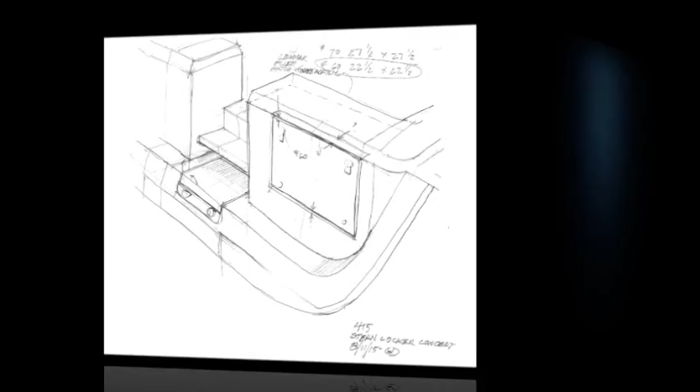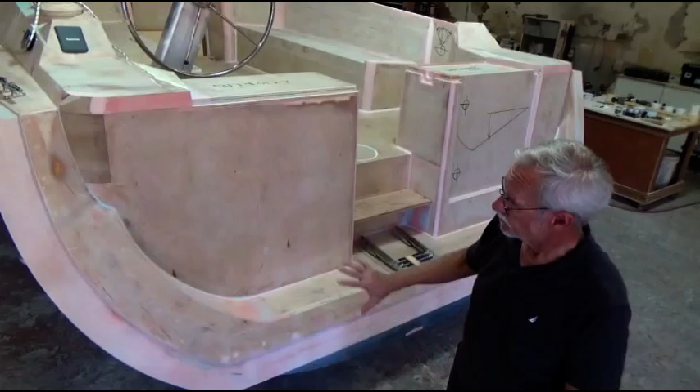We're looking at the stern of the 425 hull and deck plug. This boat will have a kind of unique hull to deck joint, a joint we first tried on the Catalina 275 Sport. We feel it's a great looking and extremely strong joint. What you see here will not be part of the boat.

The hull actually ends right about here, and this flange that you see recesses into the hull, so it's a continuous surface. Again, very strong because we've molded this corner into the hull, and the deck flange starts here. So the hull has the molded-in fiberglass toe rail.

So there's an internal flange hull and deck joint with the toe rail an integral part of the hull. Very clean looking, extremely strong. We bond the two joints with methyl methacrylate adhesive, and it's through-bolted where hardware bolts through.

What you see here is the stern platform. The hull actually ends right down here. This flange will not be part of the boat. We have a stern platform. In the stern platform, we've recessed the boarding ladder, so this will be a hatch. This boarding ladder will be underneath that hatch. It won't be mounted on this surface as you see it.

So you lift up this hatch and pull out the boarding ladder, as you do on some of the other 5 Series models. On the starboard side, there'll be a large flush hatch. Right here, it'll be trimless. This will be a polycarbonate hatch with aluminum frame, but you will not see the frame, so it'll be a flush surface, and the seat part that's part of this locker lid goes out and completely trims this off.

This hatch opens this way. It's a very large hatch so that we can have a compartment that will hold a 6 to 8 man life raft or inflatable dinghy or any other gear, but we want to make it large enough to fit a life raft. On top of this will be a fabric bin inside this locker for winch handles and small gear. Or you can remove the fabric bin and put larger gear in from the top.

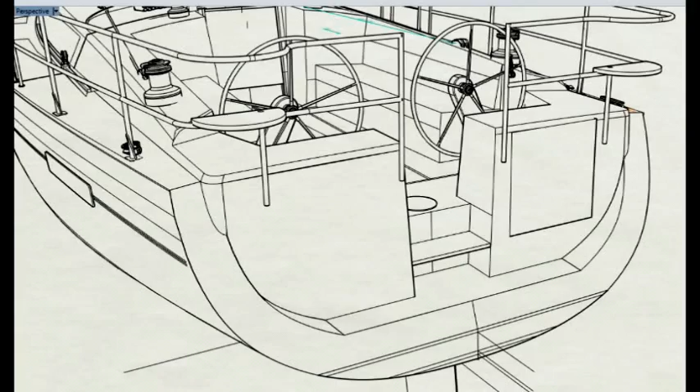For steering, we're using an Edson system. These are called the performance pedestals. They'll have a sheave box directly below and lead straight to the quadrant that'll be below decks. This system uses pre-stretched cable, so even though we have significant cable runs, there'll be very little stretch in the system. It shouldn't need the adjustment other kinds of systems use.

We have our traditional 5 Series instrument pods port and starboard, and of course this helm seat will be continuous all the way across to here. The lid's not in place right now. There are angled foot braces outboard, and there'll be another angled brace inboard, so you have a comfortable place to brace yourself on either tack.

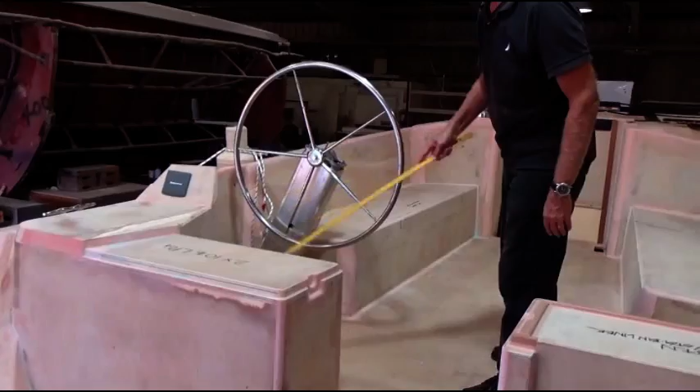These seats are approximately 7.5 inches taller than the cockpit seats, so you'll easily be able to see over anyone sitting in the cockpit. And from a seated position, you have a clear view of the stem fitting, which is very important when docking. We've located the primary winches fairly far aft, because we've heard from so many

current Catalina owners that they sail shorthanded or single-handed often. We wanted the boat to be completely controllable from the helm position.

This is a dummy winch, of course, but we do that to check for leads. The overlapping Genoa sheet leads will go through that foot block right to the winch, but this is unique. Here we have two stoppers, and there'll be a pair of these stoppers on each side.

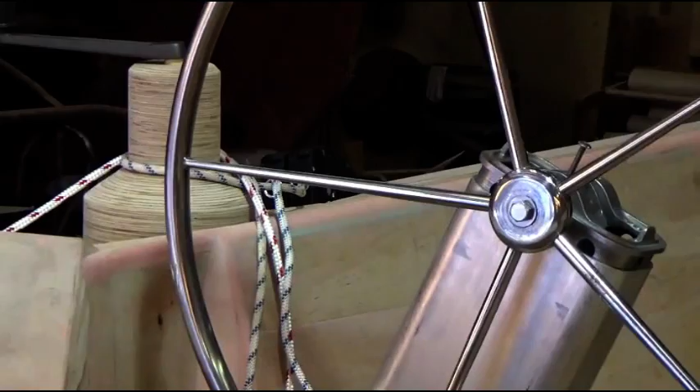Lines come from troughs recessed in the coaming caps from forward. Both go to the mast base. One is for the main sheet, the other is for the self-tacking jib sheet, which is standard. So you'll be able to control both the self-tacking jib and the main sheet from this position. Yet we recessed it so when you're coming in or out of the cockpit, there are no exposed lines to create a tripping hazard. So you'll be able to sit on top of the coamings as well.

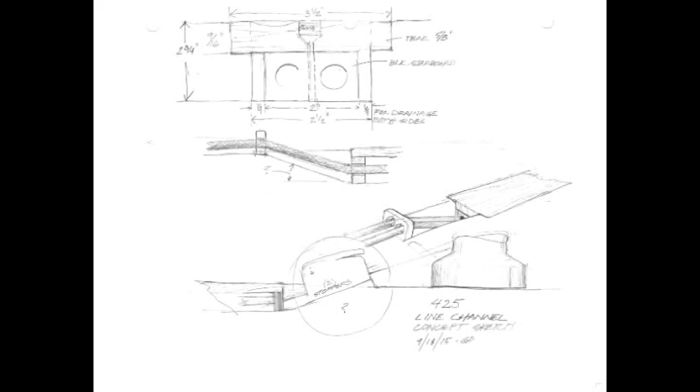We're calling this the cross-sheeting system. The beauty of this is it's extremely versatile and can be set up in a matter of minutes to the way you're going to be sailing that day. You can control both the jib and the main from the aft positions on both sides of the boat, or re-lead the sheets in a matter of minutes, so you control the jib and the main sheet from the console, both having use of the secondary winches on the cabin top. It's going to be a unique feature. I think it's going to be popular with Catalina sailors.

On this side, we're going to have a gull wing hatch because this is over the flex cabin in the interior. Both these cabins are symmetrical, but one of them is set up to be more flexible for storage. The gull wing hatch is something I've done in other models that will hinge on top of the coaming, but be flush so you'll be able to sit up there or step over it easily.

On the starboard side, we're going to have a new feature for us, and that is, you can see there's a recess right here. That will be filled with a panel that will be hinged here, and this panel will fold out and rest against the cockpit table leaf when it's down. And that'll create about a double size berth or a day lounge.

That'll be contained by the coaming on the outboard side, the cockpit table on the inboard side. So it'll be a very secure place to nap or sleep underway. These berths are all 6'6" long, so they'll be comfortable berths or cockpit seats.

Forward, we've done something here that's kind of unique. We're going to have a vertically telescopic cockpit hatch. This goes down into a cavity that's molded into the cockpit sole. This will be partitioned, so the forward half of that cavity will be for the hatch in the retracted position, but it will also create a place for sheets to be stored out of sight.

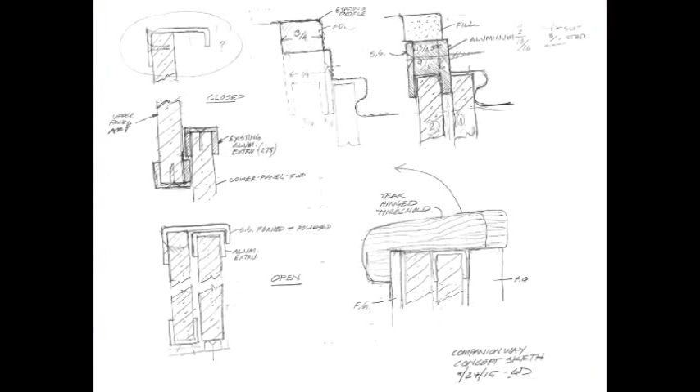This part will be a fiberglass part, not as you see it, and there'll be a cowling around here so you won't have the ability to put your foot in it, and it'll come up here to cover the hatch in the down position. This compartment has a very large 1.5-inch drain out through the bottom of the boat, so it'll never hold water.

This hatch is the companionway hatch, and this is going to be a 1/2-inch Lexan hatch, so it'll be as strong as any of the deck hatches, so there'll be good light below, and it'll be strong enough to walk on. Both of these hatches will be Lexan.

As you can see forward, they're about 18 inches deep here, and a very secure feeling cockpit. It's a boat you'll definitely feel like you're in, not on top of. We've seen too many modern designs that have very shallow cockpit coamings, and you don't feel like you're securely in the boat.

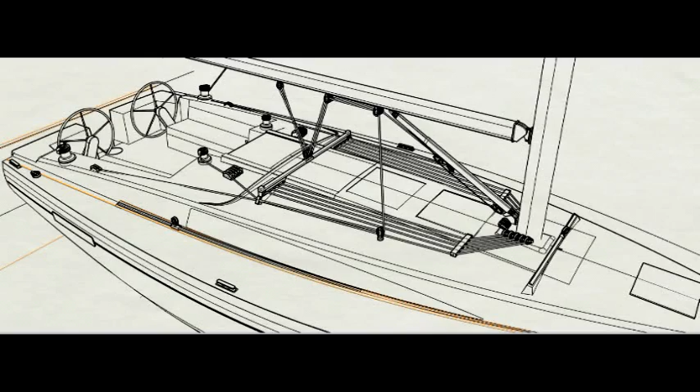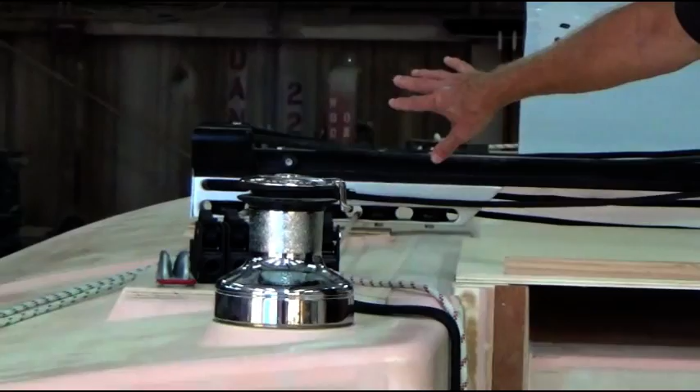We paid a lot of attention to keeping everything on the cabin top low profile. This is not the exact traveler we'll be using. We have another traveler we've designed where the sheaves are closer together, so it won't be quite as wide, and again, lower profile. The sea hood's not on this boat, but it's a very low profile sea hood.

It extends all the way forward and integrates those flush hatches that are forward. There are two hatches opposite each other, so you'll have hatches you can open regardless of the direction the wind is facing the boat. Again, they're large Lewmar trimless hatches, and they'll be flush mounted, keeping with a low profile, very sleek look we've tried to carry out throughout this design.

On deck, a couple of interesting things have been done here. Notice that the Dodger attachment points are recessed into the deck. What this will do is allow us to keep all the lines that pass through with a continuous splash guard, so water doesn't enter underneath the Dodger, and also any water that runs down the Dodger windshield goes overboard in a continuous trough.

We've worked hard to keep everything low profile on this deck, very low profile traveler attachment points. The sea hood and hatch enclosures are very low profile, and the cabin itself is very low profile, making it much easier to step up to the cabin top and have lots of free area here to sit on or to walk on when you're accessing the boom.

We're going to have what's called a double-ended or German main sheet system. That's where we're able to lead it to both sides of the cockpit aft, to either the console or all the way aft to the helm.

Something that's kind of unique on the 425, and I think is a welcome but disappearing feature on many modern boats, are very wide weather decks. These weather decks, as you can see here, to the toe rail, are about 25 inches wide. It's great to have nice wide weather decks with our 28-inch handrails, which make going forward unimpeded with no toe stubbers to worry about.

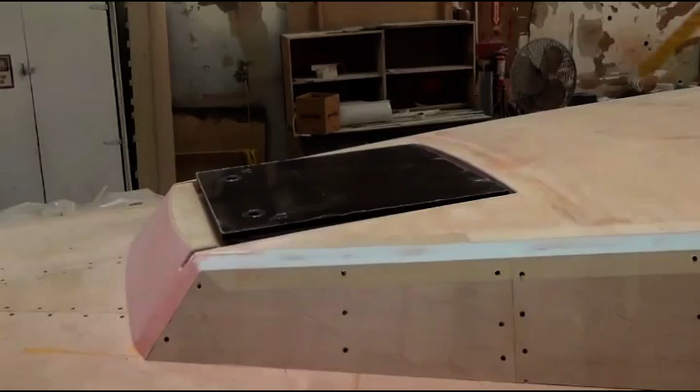Forward of that boss for the self-tacking jib track, we have a little over 6 feet of flush cabin top area. This is a flush hatch, and we're going to offer an optional sun pad that will be held in place by handrails on each side. So you have about a 6 foot by 6 foot sun lounge on the foredeck.

I'll show you what a low, sleek deck this is and how nice and wide the weather decks are going all the way forward. Plenty of space here if you're going to be handling a spinnaker or the asymmetrical.

Forward of this anchor locker is going to be the double anchor roller, and we're doing a different kind of anchor roller than we've done before, with anchors spread apart a little bit more, so you can carry 2 large anchors permanently on the rollers if you choose to do so, and they'll be led in a stainless steel channel all the way back to the anchor locker.

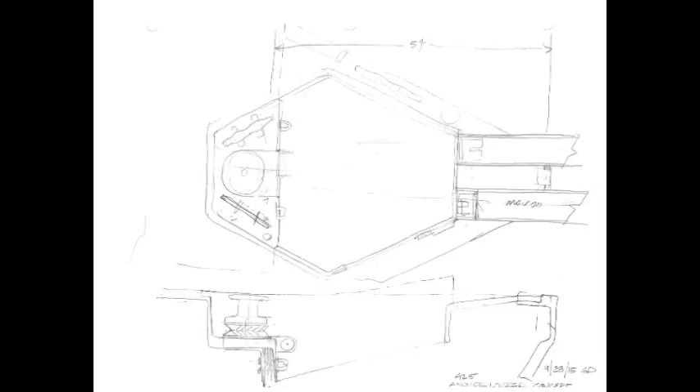The anchor locker we're doing a little bit differently than we've done in the past. Again, it's evolutionary. We learn something from each boat we do. And as you can see, this is sort of a modified diamond-shaped anchor locker lid. And it's set up so you can easily handle 2 rodes, one on each side of this divided bin.

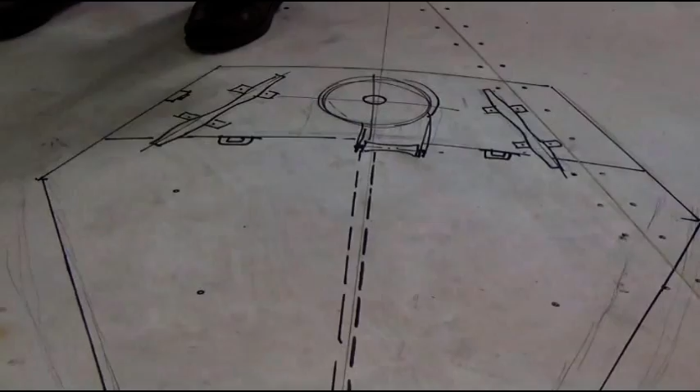We chamfered the corners so you have a place to step, because there are times you need to be able to walk forward to get to the anchor roller. And if you have a very big lid with square corners, it's difficult to do that. This also gives us a place for cleats for each rode and dead ends for each rode. Of course, this is a vertical windlass with a gypsy below and a bollard on top.

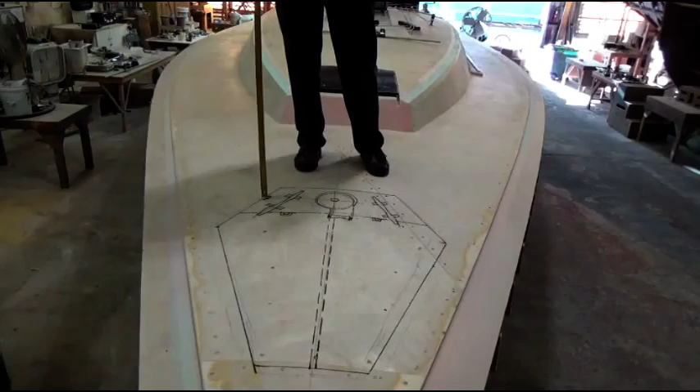This is where we'll have a plug for the wired windlass control. We're not going to do power up and power down buttons. I think they're a little awkward to reach. So it's much easier for most folks to be able to keep both feet firmly planted on the foredeck and use a handheld remote. We'll also have an optional plug for this remote in the cockpit for those who want to deploy the anchor from the cockpit.

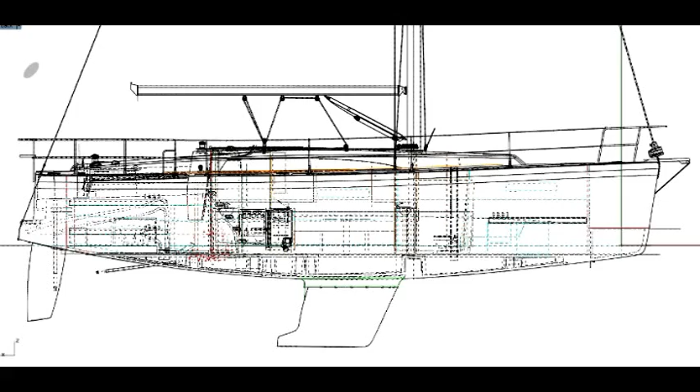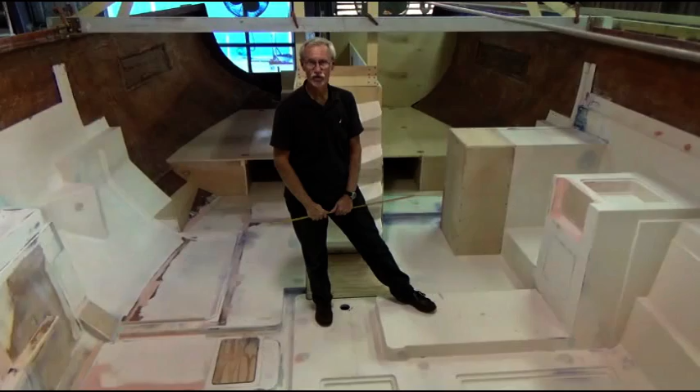We're inside the hull liner plug for the new 425. Where we are in the tooling sequence right now is we have completed a hull mold and a hull collar mold, and we've completed the mold for the grid. We have built both those parts. There's a real grid underneath this, and this is a real 425 hull, which we wanted to have the exact laminate so we get all the thicknesses correct.

Where it's blanked out here, there'll be large windows in the hull, but not cut in yet, of course. This hull liner is a mock-up. We'll make a mold from this to make the actual hull liner for the interior. What you see at this point, because there's no sole down, are the cavities. It'll be subsole. This will be open, of course.

This will be a water tank, and on the port side will be a large fuel tank. We've elected to keep all the tanks large and low and subsole. They'll be removable and accessible, but we want to concentrate the weight low and in the middle of the boat. Of course, the keel is right here. What you're looking at,

the galley will be here on the port side. There'll be a countertop coming out to this surface, a large front-loading fridge right here, a smaller freezer compartment, and we beefed up the insulation on these freezer compartments, so they really do make serious freezers now.

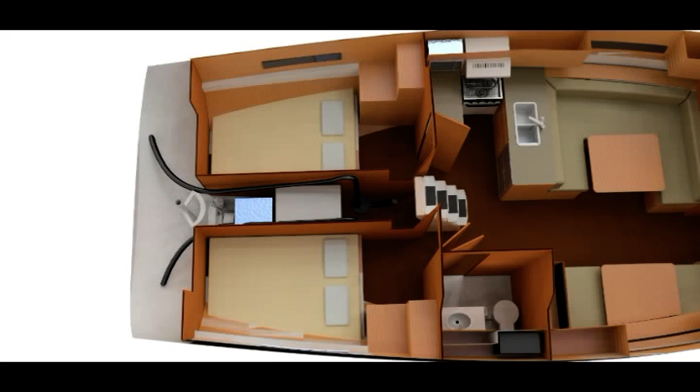There'll be a 3-burner stainless steel stove here, stove hood above, microwave, pantry on this side, door to the aft cabin, symmetrical door on the other side to the aft cabin. This area right here will be the aft head. So there'll be a passage through here to the aft head and the aft cabin.

Because we're using a recessed companionway in this boat, one that telescopes below the cockpit sole, we're able to keep the threshold height very low. So even though you can see this represents headroom inside the cabin, we have a lot of headroom, we're able to keep the threshold height very low.

And the beauty of that is we can use this very nice 4-step companionway ladder, which we have used before in other models, and it's probably the easiest ladder to navigate. It's been a popular feature in some other models. So again, we want to integrate the features we know work from previous models into a new model.

The engine will be directly behind this. This will hinge in some fashion. We're not sure if it's going to hinge up or forward yet at the bottom. But behind this will be the engine space. Great engine access. There'll be 2 AGM batteries here. The primary engine, which will be the new 57 horsepower common rail Yanmar diesel with electronic controls, will be right here. So you can see when that's open, you'll have great engine access.

We've elected to keep these bulkheads parallel on each side to create a large mechanical space or engine room in the center of the boat. What that does is gives us a place for the engine, allows us to accommodate a 6.6 or 6.5 generator in a sound shield box in the center of the boat.

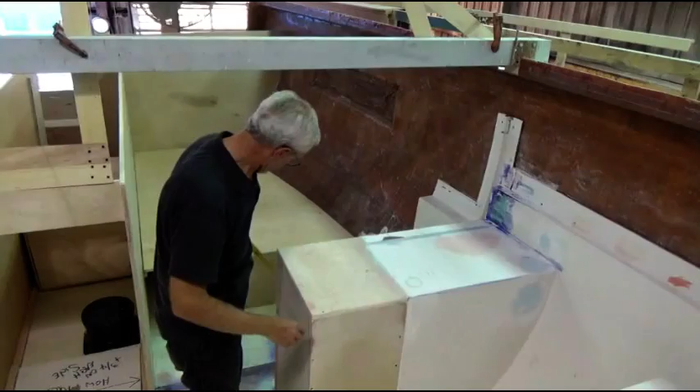You can see our weather decks are quite high, which we like because we all have a lot of headroom and great visibility all the way out to the hull sides inside the boat. The bulkhead will be right here, of course. After the bulkhead, there's almost 3 feet of floor space in this cabin. It's a little bit bigger aft cabin than we've done in some other models.

This cabin, this side will be what we call the flex side. Even though the cabins are equal size, both have berths that are 54 inches wide at the head, which is double berth size, or double bed size. This one will be more suitable to be used for storage when it's not used as a sleeping cabin.

What we're going to do in this one is this part of the berth will hinge up and lock in this position. So you can use this as a large storage bin for bikes, crab traps, fenders, whatever you need to carry along. And then it'll fold down like this.

And here on this side will be a series of large hinged doors. And when these doors are opened, you'll have access to the port side of the engine. You'll have access to the service side of the generator. You'll have access to the hot water heater. You have access to the air conditioners. So all the stuff you need to get at are right here.

We'll also have, right in this area, our traditional 5 Series filter locker. So there'll be a locker door you can open up and have access to the fuel filter and the cooling water filter and the anti-siphon valve all in one location.

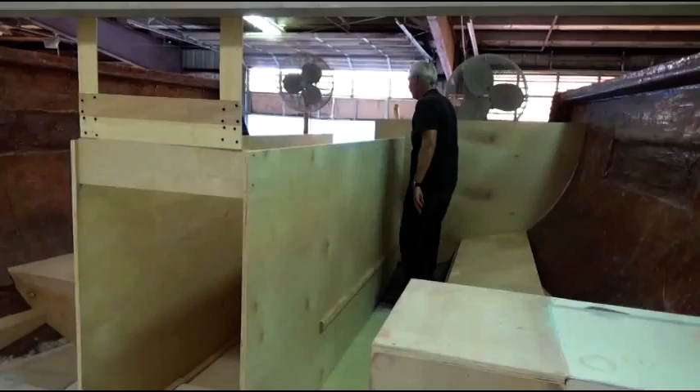The beauty of this big gull-wing hatch is it lets us get any of the tanks that are in this boat out of that hatch, and all the tanks are removable, so we don't do any captive tanks. But when that gull-wing hatch is open, you'll be able to use this as a work surface or get things in and out of it very easily without going through the companionway.

The 425 has a very generously sized owner's cabin forward. The bulkhead will be just about here with a passageway door. There'll be about a 16 to 20 inch end table on the other side of that bulkhead in the main cabin. On the forward side of the bulkhead, it'll be right here. We have a 40-inch wide hanging locker, and then forward of that, a seat. This is a little passageway for wires, of course.

Subsole in this cabin, we have an 8D battery, which services the windlass and bow thruster. And in typical Catalina fashion, we've molded in channels that are subsole for wire runs throughout the boat. So to access these, you just lift up the cabin sole and the wire runs are all there. This, of course, goes to the bow thruster and the windlass.

This will be the berth platform forward. It's the largest berth platform in any of the 5 Series boats. It's about 6 inches longer than the others we've done and about 6 inches wider than the other berth platforms we've done. It'll have our traditional electric lifting forward end, so you can read in bed without a lot of pillows. Right here will be a bulkhead, of course.

This will be a locker, a blanket bin, and the after end of this berth will hinge up and down. Here will be large double drawer lockers. These will be bilge accesses. The head will be right here on the port side. We're going to have a stall shower in the corner, a vanity with a vessel sink, an electric head with a gravity drain waste system. Again, things we've done, tried and true for us. Again, we build on the systems we know work and integrate new designs as they become available and proven.

Well, I think that's about the interior of the 425.